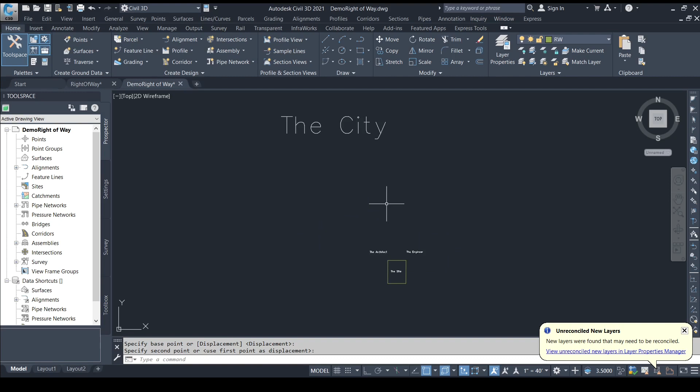Our next presentation is based on a proposed multifamily residential development, which for purposes of this discussion, shall be discussed in a way which applies in a global context, not within any particular area. That being said, the geographic location of a project is a driver for many of the engineering judgments made by

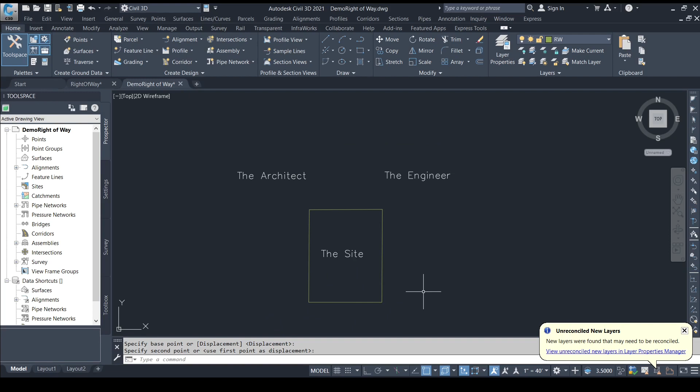the land development engineer. The early planning for most land development projects is typically done by an architect, or architectural company. We may refer to such individual or company as the architect. Similarly, the land development engineer, either individual civil engineer or civil engineering company, shall be referred to as the engineer.

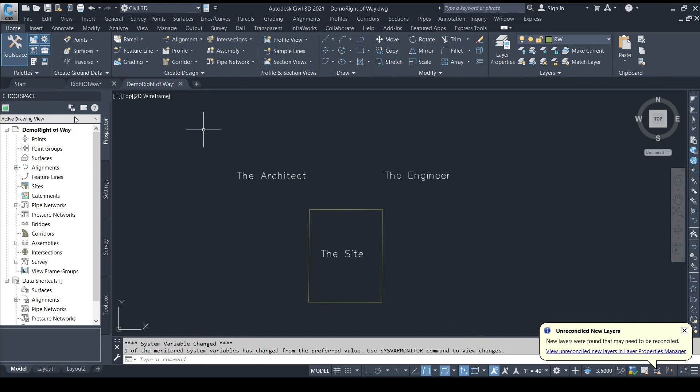The architect has provided a layout for a series of buildings and an interior road network. The land development engineer looks at the linework as if the building is essentially a kind of black box. Keep in mind that there must also be a structural engineer employed for the residential buildings and other buildings. This is to differentiate between the site engineer and structural engineer. This is quite often two different companies or individuals.

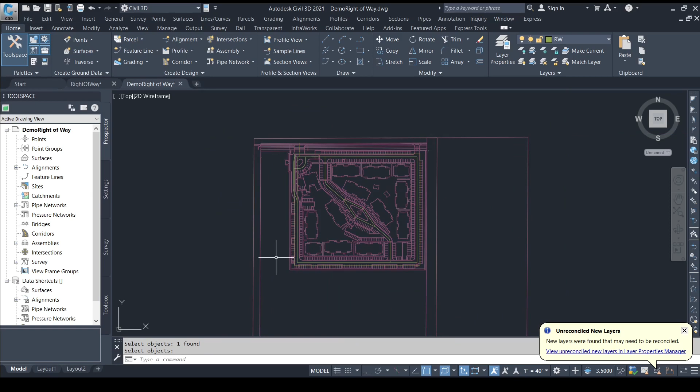Generally, we can assume that the larger the project, the larger and more complex the contractual framework becomes between the various consultants employed. Looking at the project from the land development engineer's perspective, the building is viewed in terms of a building footprint. The entry points and access to the buildings are main considerations of the land development engineer, but building interior is within the architect's scope of work.

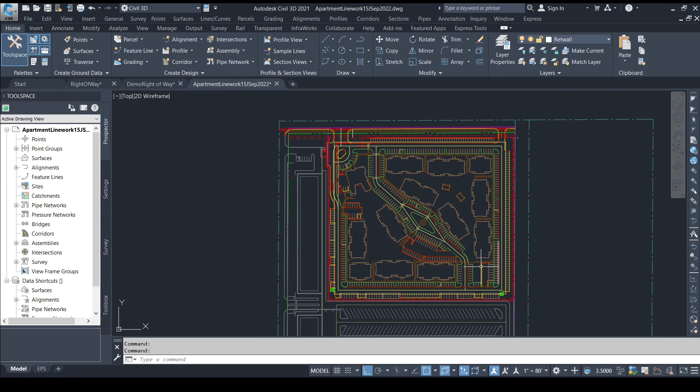We will introduce the concept of site line work, which, as the name implies, is a drawing containing only lines and no text. The site line work drawing may be viewed in different styles depending on what we want to emphasize, or de-emphasize, on a particular presentation. The actual drawing file for site line work would appropriately contain different colors for different building features.

Two of the most relevant line work features would be the building footprint, and the curb face line work. The curb face generally delineates the paved areas within a site, or at least provides a sense of site layout which we intuitively grasp once we view the site line work drawing.

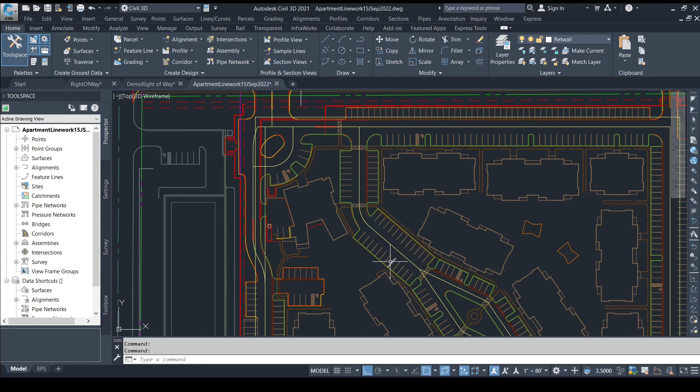It has become common practice to maintain the site line work drawing as an X-reference which may be loaded onto various other drawings. The goal will be to prevent other users working on the project from inadvertently moving or rotating our site line work. If the master site line work drawing is changed, it will automatically be reflected on all drawings which contain that drawing as X-reference.

When we X-reference our site line work drawing into another drawing, we can change all the colors of the X-reference drawing to one color so as to recognize it as an X-reference. The CAD program typically helps us to visualize what is being X-referenced by reducing the brightness of X-referenced content. We can further assist ourselves to recognize X-ref content by changing all colors of one X-reference to a single color, preferably a pastel color.

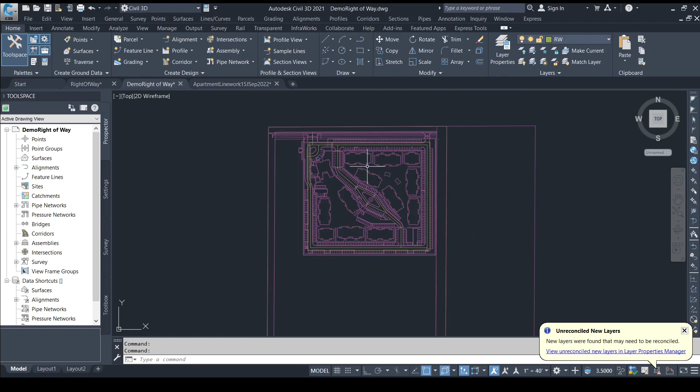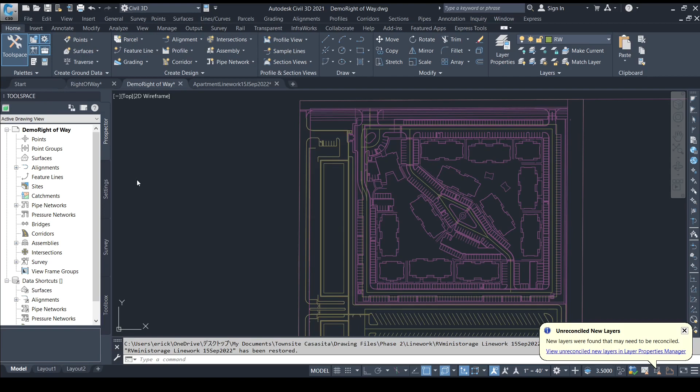Land development often occurs in phases. Therefore, drawing files of site line work may be separated into multiple files. It is becoming clear that file management is one of the key considerations when creating design for land development projects. In this case, there is a second phase development being considered which influences design of the first construction phase. We show second phase line work as X-reference with different color to help visualize the limits of first and second phase.

To summarize this presentation, we have introduced the concept of site line work as separate drawing files to be X-referenced into our drawings as a first step in creating land development site civil design.